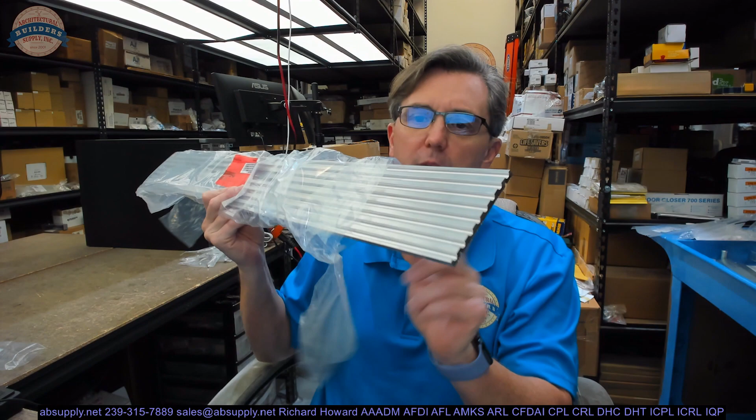This video is to bring you a closer look at the Zero number 674A. This is what they call an adjustable threshold. There's really nothing inherently adjustable about this threshold. What makes it adjustable is that it's modular, and the system in which it is used, you can alter or adjust, I suppose, the height at which this is installed.

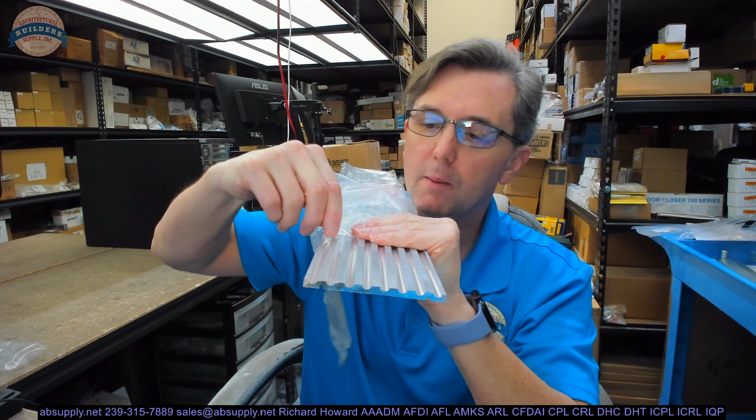This is just a flat plate, and this flat plate is going to have these ball grooves as a feature inside of it. When this is extruded, it's extruded through what I think is called a die set. And items like this are very typical and common to use in the sense that when you need something that's going to be 1/4 inch and solid, this meets the bill very well.

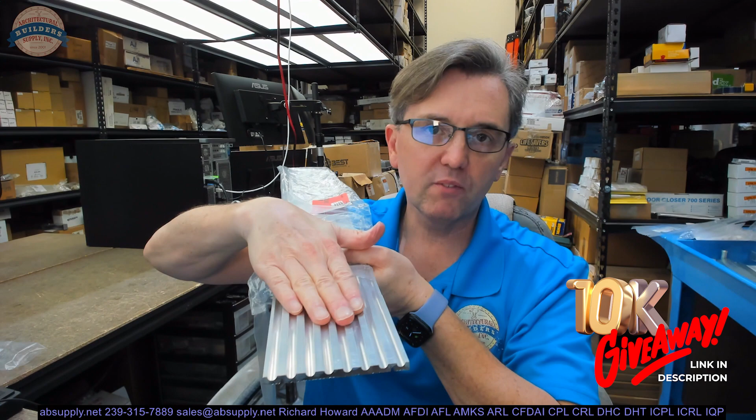In fact, an item like this can be manufactured in lots of different lengths, whether it be a single extrusion or those welded together. And it's a very effective way to seal the bottom of a door, or at least give you a sill onto which you can seal the bottom of the door. When it's only 1/4 inch, and you want something that's going to be robust, not a saddle threshold where you might be taking a substantial amount of pounds over it, like a two-wheel handcart where you're taking 100 pounds over it, or even worse, something solid like this is nice. And that's really kind of what this is for.

This happens to be a 4-inch wide piece. Okay, 1/4 inch tall, as I said earlier. It happens to be 0.07 pound per inch. So you can calculate this 3-foot piece happens to weigh about 2.7 pounds, roughly, or at least it does with the fastener package that Zero has included. These appear to be number 10. I would have to think they're number 10 1.5-inch flathead sheet metal screws is what they appear to be.

And that's where I would use this. This 674 is a component in a modular system, which I'll show you in a moment. But used on its own, you want something that's 4, 5, 6, whatever the width. You want something that is going to be fairly robust, 1/4 inch tall, and give you that anti-slip resistance that those ball grooves will give you. This is a great contender. Also very appropriate for coping around a jamb if you order a wider unit, etc. Okay. Let's switch to the screen view and let's take a closer look at the supporting information.

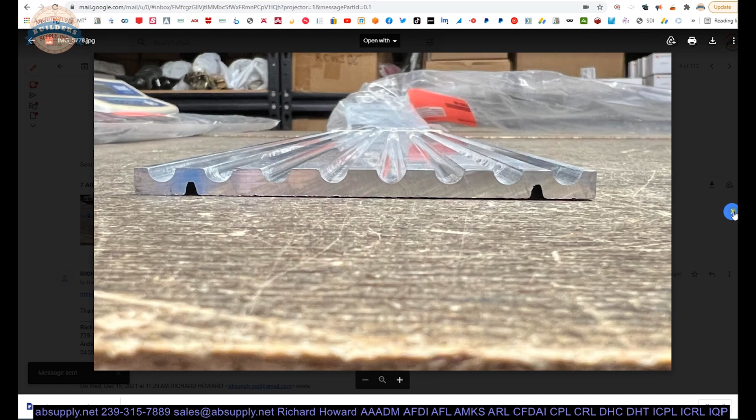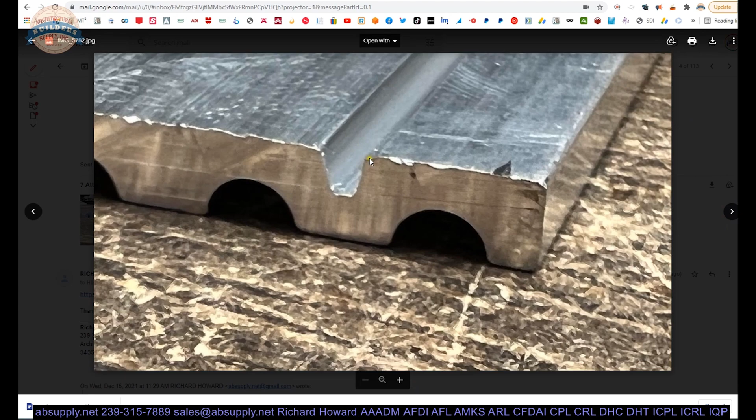Here is the item that we are indeed looking at. Okay, let's take a look at some photographs that we have linked to down below. Here's a cross-section profile of what that looks like. Close-up of a leading edge. Also this little V feature here. We'll talk about that in a moment. Looking down at it, the underside of that threshold with the V groove. It's turned upside down, showing you that V groove. Another view, and then the fastener package.

Now, this is what the profile looks like in the catalog. Installation instructions are here. Not a lot to talk about. Measure twice, cut once. That's basically what these are. Coping around a stop is a great idea. If it was me, I would probably look to even run it to the outside of the frame. So let's say that this is about 6-inch. You know, I might go with an 8-inch, or I might bias this a little towards the outside and run that long.

What some people like to do is run those thresholds long, and in fact, in an exterior application where you have a threshold, it would be considered best practice to have that threshold run all the way across the face of the frame, because that's an area where the frame from the outside will be attacked by corrosion. It's attacked from the inside for sure, but the outside, well, what I always recall is I had a customer who would always order two things. He'd order his thresholds long and cover the bottom of the frame. He'd order 4-foot thresholds and cut them back for 3-foot doors. So he's covering the face of it.

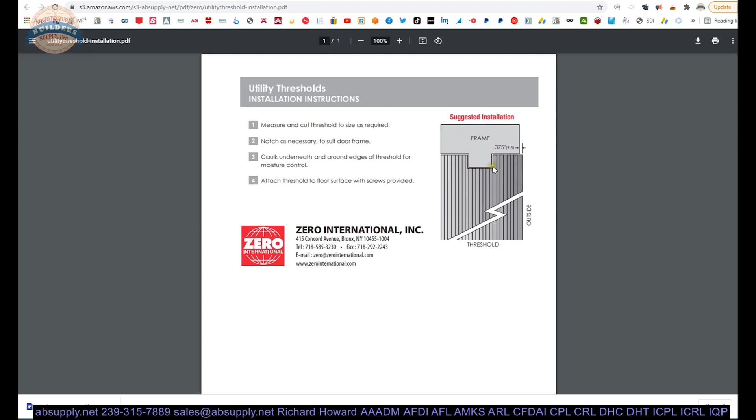He would also order undercoat. He wouldn't order it from me. He'd buy it from an auto supply store, and he'd spray the inside of the frame with undercoat. This is a northern climate where salt is thrown down routinely in the parking lot, and that's how he went around trying to preserve those frames. Okay, and then coping it around a threshold, obviously, around a jamb.

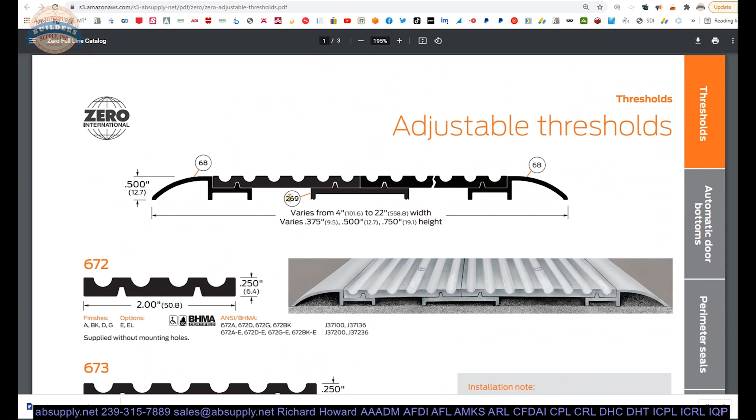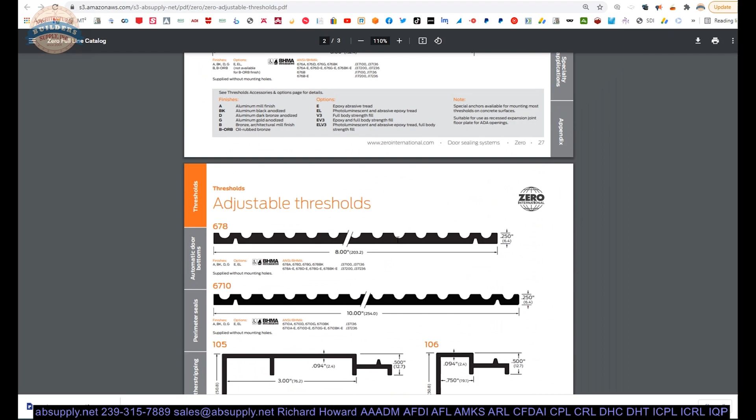Now, product brochure, that's what I'd like to take a look at. So we're looking at the 674, and herein lies my reference to modular system. And it's right here. So you can, with these components, create yourself a custom style threshold, okay, using all these different components. These are really nice. They'll allow you to not only serve as custom width thresholds, but allow you to finish off the face of a sill as well.

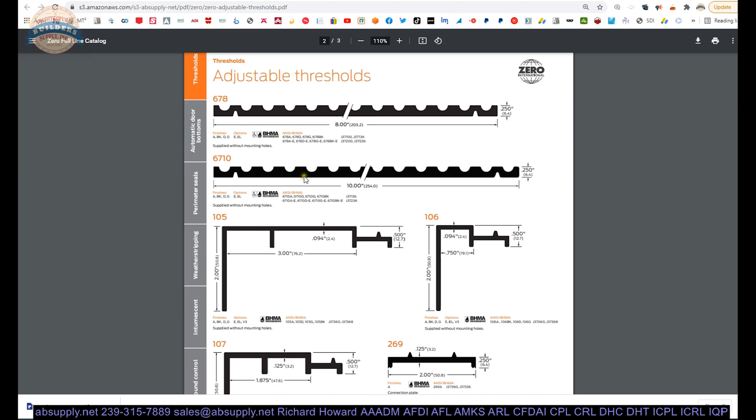A common application for that would be a hollow metal door on the back of a restaurant with access to either the rear of the building in a parking lot or maybe an alley. And you've got a concrete stoop or sill, I'd call it a stoop, right? Or a sill, and you can have that come down and cover the face of that as well, and then give yourself that fluted top that will rest right on top of here. And these components here, those are meant to be braces underneath the threshold so that it doesn't crush in on you.

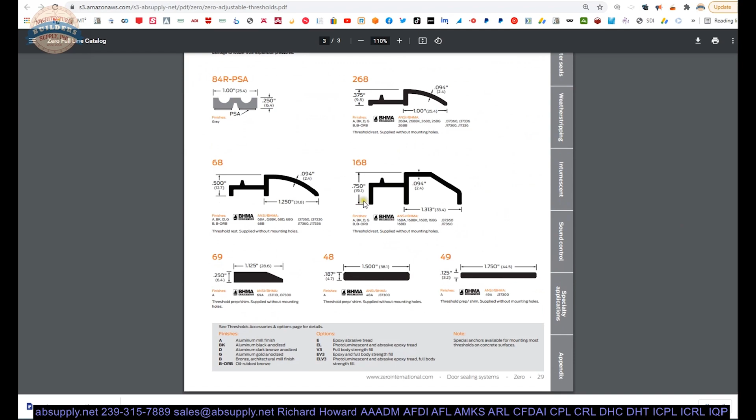Now you can take all of these components and order them loose and literally come up with this design that they're showing us here. Or you can have all these components and then ask the manufacturer to weld them all together. And while that, of course, drives the cost, they will do it, no doubt.

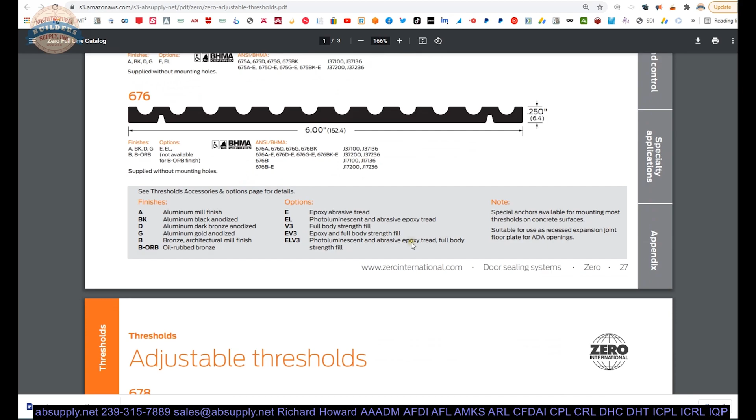It's important to note that there are no holes for these fasteners drilled at all, although they do supply fasteners. If you want them drilled, there's probably going to be an extra cost and probably going to be the requirement of a sketch sent to us for them to locate the fasteners exactly where you would like.

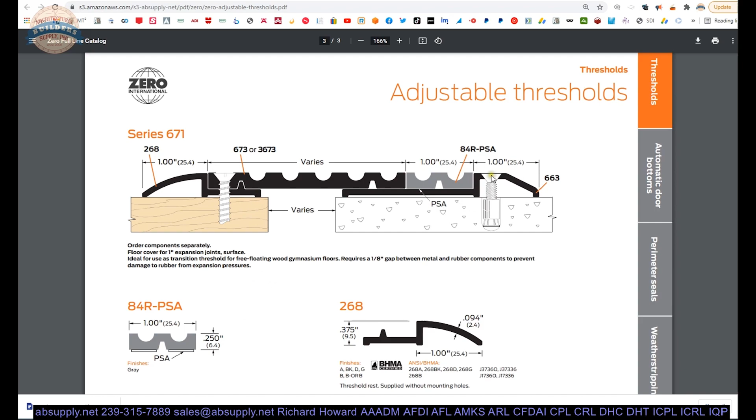And just another way of showing you this material. This is handicap compliant. You cannot exceed a 1/4 inch height with this 90-degree sort of feature and still be handicap compliant, but maximum 1/4 inch height is handicap compliant. This rise over run relationship would also be handicap compliant.

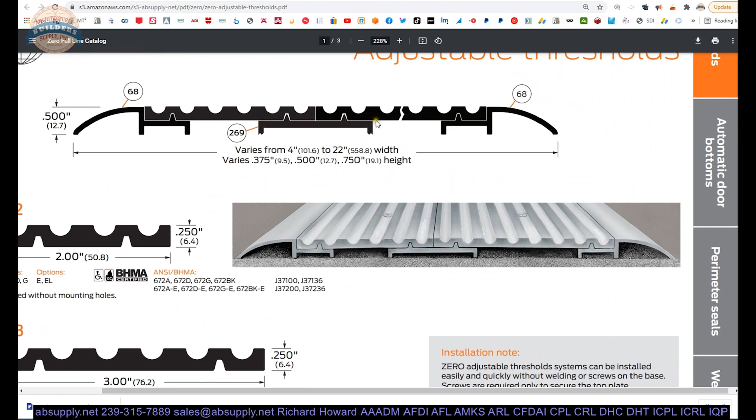So when they say adjustable, there's nothing on here that you're adjusting to achieve different dimensional properties. I would call this a modular system. There you go. Okay, let's now do this. The extended description information that's here, this is mill finish. That's what the A means from Zero. If it's an AA, that means it's an anodized finish. If it's D, it's dark bronze. BK is black. I think they use G for gold.

Okay. It's available on the site in lots of different lengths, everything from 2 foot maybe out to 8 foot. If you have need for a custom length, by all means, enter the net length in the comment field after ordering the next longest piece or pieces, and then we'll relay that information to the factory.

There is a link below this video as seen here to the manufacturer's page. When you click on that, you can pull up not only all of the Zero products that we sell by means of this horizontal navigation, but also a link to the manufacturer's website, as well as a link to the full product catalog that is here.

Okay. Other encyclopedic documents are here. There's an Allegion technical manual. I don't know if that has any reference to Zero. There must be a Zero reference in here somewhere, I would imagine. Or it just could be that since Zero is an Allegion property, we may have stuck that here. I see no reference to Zero. I'll leave it here.

What is helpful is the A117.1 document. As you can see, this is titled Accessible and Usable Buildings and Facilities. If you are not sure of what the federal law requires when it comes to anything handicap compliant, this is the governing document. Thresholds. I just did a find or a search on my keyboard for threshold, and you will find all of the matches for that.

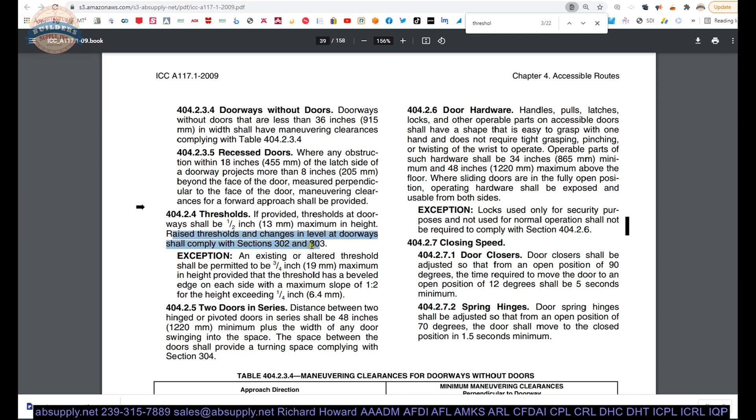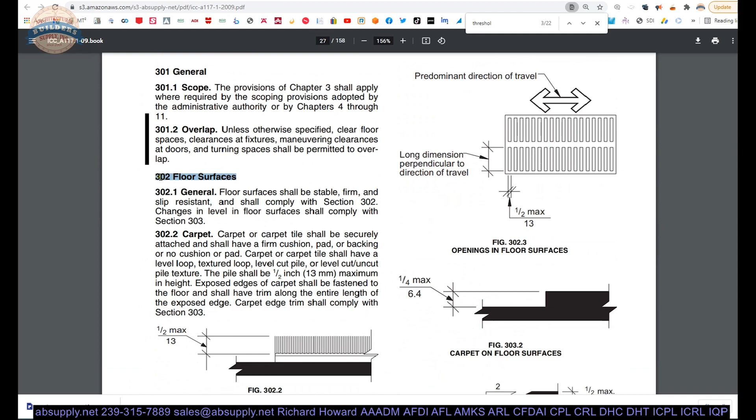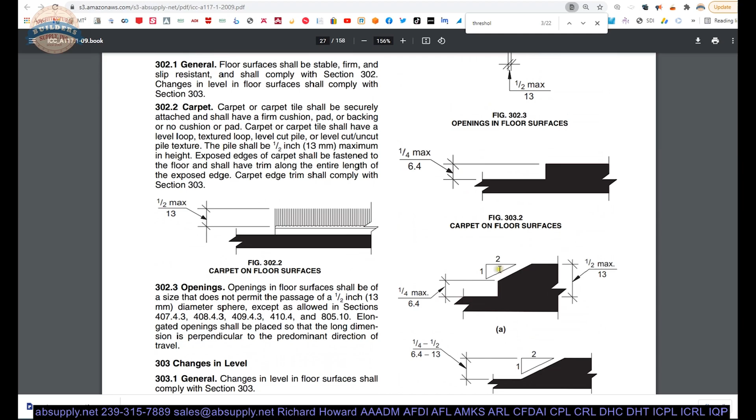So, thresholds at doorways shall be 1/2 inch maximum in height. Raised thresholds and changes in level at doorways shall comply with sections 302 and 303. Okay, well, we're in section 404 right here. Let's go to 302. Chapter 3, okay. Well, here's 302, floor surfaces. So this is where you're going to want to start to read through here. There's that rise over run relationship. Every manufacturer of thresholds who has a handicap compliant threshold will have a leading edge that is compliant with that.

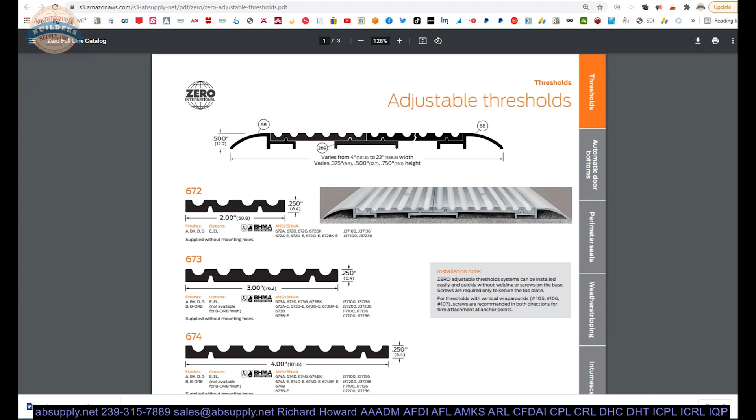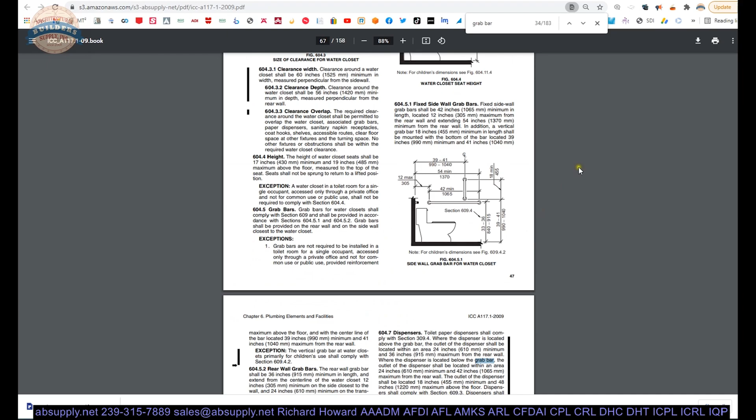Anyway, this document is really handy because it allows you to stay on the correct side of what's required. What's also in there is references to grab bars. So if you're doing a project and you're not sure where to locate the grab bars, well, they're in Chapter 6, and they are in here. There you go, 33 to 36 inch. There's your answer. Great document to have at your fingertips.